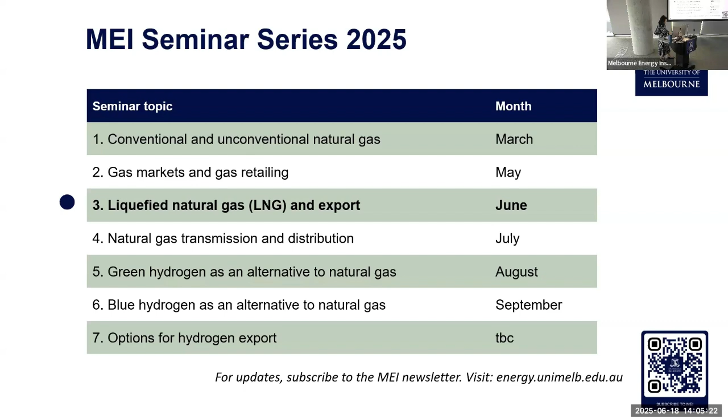So I'll move on to my presentation. The presentation is basically 4 areas. Firstly, some fundamentals about LNG, a bit of history about it, some considerations of the aspects that drive the so-called value chain, and then the place LNG has in the global energy mix and demand, and finally where the LNG supply chain space is with regards to our decarbonisation journey.

So firstly, this may be something that many of you are already aware of, but I'll go quickly through it again anyway. What is natural gas? Basically, it's a generic term that refers to a mixture of light hydrocarbon components. It's generally mostly methane, anywhere up to 90%, with a few heavier components such as ethane, propane, and butane. So the actual composition of any natural gas depends on the reservoir which it's been extracted from, and also the market that it is going to be consumed in.

The chart in the top right shows a number of different sources of LNG, their Wobbe index, and the fields and the regions where they are produced and used. The natural gas heating value and composition can actually be tweaked while we're producing it, and also at delivery to allow entry to different markets.

The cost of natural gas is based on its energy value, and by that I mean it's bought and sold at a cost which is basically per million BTU or terajoules. This is a little bit different to oil, which is cost per volume or per barrel within a density range. So when you cool down natural gas to minus 162 degrees, it turns to a liquid, and that makes it much more safer and efficient and convenient to transport on a high volume basis.

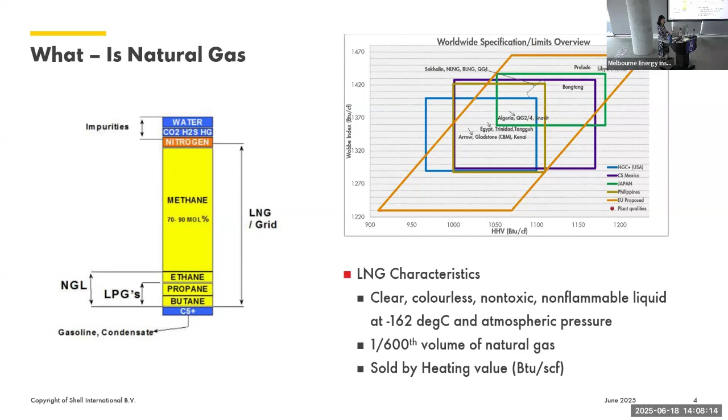So moving on to the why of LNG. Turning natural gas into LNG allows the effective distribution of energy to the end users - economies and industries, homes. The sources of gas tend to be in fairly distant and quite inconvenient locations, a lot offshore, deep water, making it hard to access. By producing and liquefying natural gas, it enables the international trade of energy, provides energy and energy security for countries which do not have their own natural resources, and it therefore allows flexibility and reliability for where gas is sourced and where it's used.

In the past, pipelines were a common method of delivering gas to users. The technology of a pipeline is quite simple, we're all familiar with it and it works very well, but at longer distances they do start to become very uneconomic. You need a lot of compression stations, a lot of power. It's also not very flexible to change capacity.

And a recent example of how a pipeline can be quite limiting is the Russian pipeline gas, which used to be a major supply of energy to Europe. Since the situation in Ukraine, much of that method of supply has actually been cut off by sanctions, and so the import of LNG via the sea has filled part of that energy gap.

The environmental impact of LNG as a baseload fuel supply to power plants is much lower than coal. Natural gas produces about 50% less greenhouse gas emissions and significantly improves air quality. Gas-fired power stations don't produce the same significant particulates and SOx components that coal-fired power does, which results in higher air quality, less respiratory health impacts, and the smog that is very visible in coal-fired areas.

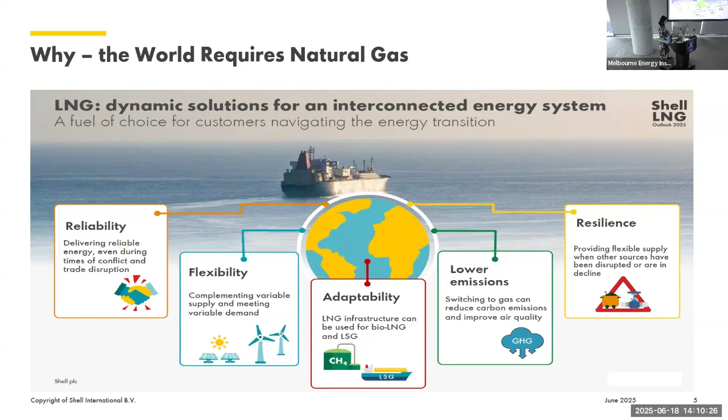So getting on to how LNG is produced. Well, the fundamentals of making something cold are quite mature. We've all got a version of it in the home - our refrigerator. It uses the Joule-Thomson effect to cool a fluid and reject heat to the atmosphere. An LNG facility uses the same thermodynamic basis, but just on a more efficient and a much larger scale.

Once you've sourced the gas, you need to clean the gas to remove impurities such as CO2, H2S, nitrogen. Then you need to dry the gas, remove water to avoid those components and water freezing up and blocking up the process, but also to comply with the end user specification. Once you've cooled the gas to liquid, you need to store it, and then you need to deliver it to the customer. So the whole process is quite energy intensive - you need about 7 to 8% of the natural gas to be consumed as fuel to produce LNG.

There's two main technologies which are common in the baseload LNG production world. The mixed refrigerant process, where you could have a single mixed refrigerant or a dual mixed refrigerant with a propane pre-cool cycle and a main refrigerant cycle. The second type, which is now quite prevalent in the United States, is the cascade process, which uses pure components - a propane cycle, an ethylene cycle, and a methane cycle.

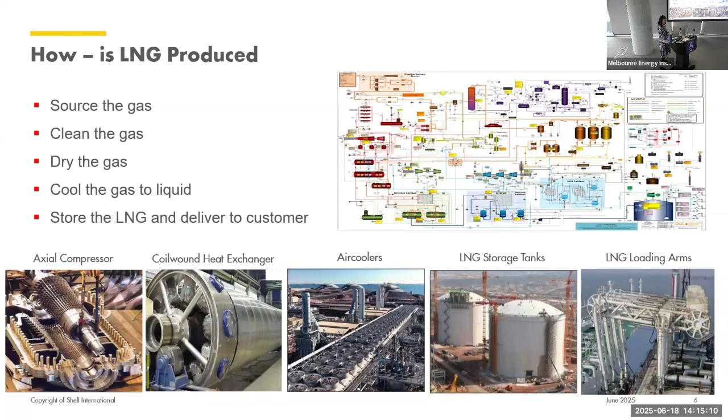So when we talk about the LNG value chain, really it's just the phrase that covers the journey of a molecule of methane, which starts from the reservoir through the wellhead, where it comes to the surface. It's then treated, goes into a liquefaction plant, cooled to liquid, then is loaded onto LNG carriers, sailed across the seas to its export destination.

The chain continues at the destination. As it's unloaded, it then has to be turned back into natural gas in a process called regasification before it's able to be delivered to end users via the domestic piping network to be burned for energy.

Just a few words on how LNG is commercially traded. LNG does differ from the traditional oil market in that typically you have a long-term relationship between the buyer and the seller. That's because facilities are very expensive, tens of billions of dollars. They take a long time to develop and build. So generally 4 to 6 years for the development phase, and then another 4 to 6 years for the actual construction.

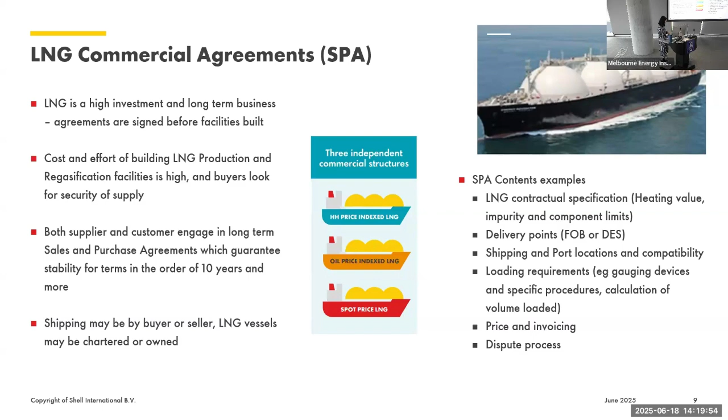So as I said, for end users of LNG, you need to turn the liquid back into a gas by vaporization or through a regasification plant. It's the reverse of how you make LNG. You're putting heat back in.

It still requires a facility that uses technology, and the most common technology is the open rack vaporizer, which uses seawater, which is very readily available at LNG terminals, as they're generally on the coast in ports and in coastal areas. There are also some LNG terminals located inland, where you can use ambient vaporization and heated vaporization.

In the last few years, there's been a very fast emerging group of users in shipping and heavy road transport sectors. LNG generates 25% less emissions than diesel and marine bunker fuel. So there is actually a changeover driven by both social expectation and a legislative mandate for greenhouse gas emission reduction. Now, given that 90% of the world's physical goods are shipped by sea, this is quite a sizable contribution to reduction of greenhouse gas emissions.

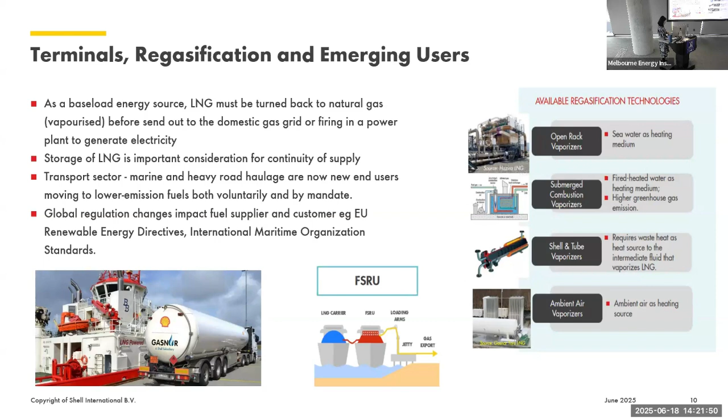LNG demand at the moment is around 400 million tonnes per annum, and it's projected to increase to just under 700 million tonnes by 2040. Now, of course, forecasting is an art. It's informed by global dynamics, and black swan events like pandemics, wars, and changes of government can result in very different actuals and estimates.

Last few years' demand projections were a little bit higher than this year, so there is some fluctuation. It is slowly coming down, but it is still a significant increase in demand.

The top LNG importers of the world, as I mentioned before, are Asia: China, Japan, South Korea, India, Taiwan, and very recently Europe. So Spain, France, and the UK have increased their LNG import as a consequence of the Russian gas sanctions.

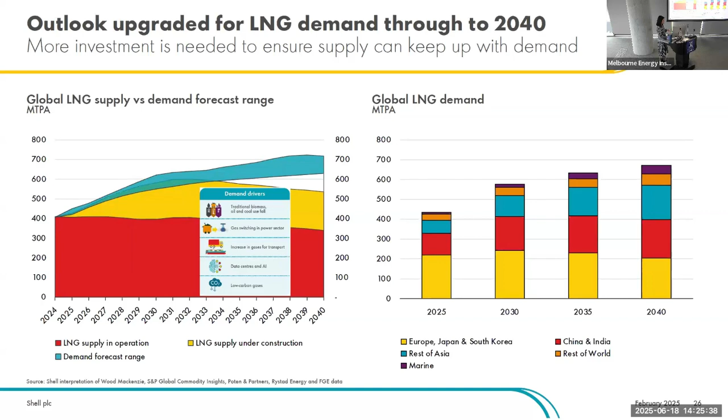In terms of capacity and production, the top producers in the world are the US, Australia, Qatar, Russia, Malaysia. There's also currently new LNG capacity being built in the US still, Qatar, Nigeria, Abu Dhabi. So demand and supply are still working their way out.

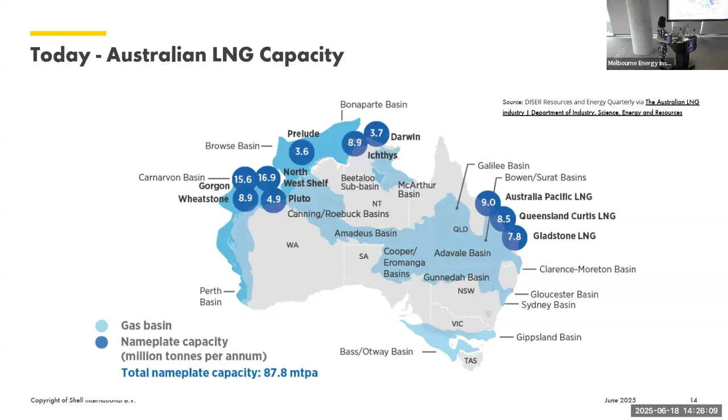So now moving on to some words about decarbonising the LNG supply chain. Since I last spoke in 2022, the efforts in decarbonisation inside the LNG supply chain have become quite clear. There are a few emerging directions, and decarbonisation is driven not only by suppliers but by customers - 98% of importing LNG buyers actually have a net zero commitment. One effort is to reduce the carbon intensity of the existing LNG production process and infrastructure.

As I'd mentioned before, making LNG is actually very intensive. You need to spend about 7 to 8% of the gas for fuel, for compression power, generally in gas-fired turbines, and also to supply energy for other parts of the plant and process. So electrification of LNG facilities using renewable energy will reduce the emissions otherwise generated by fuel gas. There are some existing LNG facilities looking at options to convert their existing gas turbines to electric motors, and there are other facilities in construction right now which are all electric drive by design.

Another way of reducing emissions from gas firing turbines is by utilising different fuels. So adding hydrogen to gas and using that in turbines reduces carbon emissions. That's quite a fascinating topic because it has to be enabled by the supply of hydrogen, and you also need good collaboration with your turbine vendors for appropriate technologies. It's a less mature option than electrification, but it looks quite attractive because there's a lot less modification of an existing plant than retrofitting electric drivers.

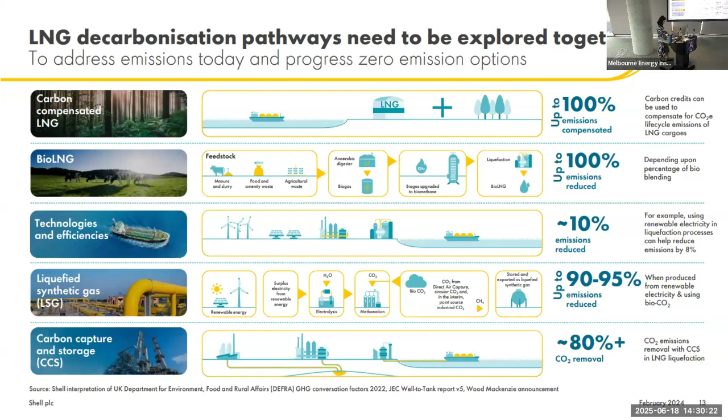So I'll just go to the next one for synthetic LNG or liquefied synthetic gas.

So this I find really interesting. The concept of synthetic LNG is methane produced by using green hydrogen as a feedstock, reacting it with carbon dioxide to form methane and water.

So the methane then is cooled and liquefied in the conventional LNG process and shipped in conventional and existing LNG value chain infrastructure. As part of the circularity, CO2 would come from direct air capture or industrial generation, for example the biomethane off gas we talked about or CO2 capture from flue gases.

I think the concept of generating green hydrogen and then conversion to methane is basically based on the practicality of using the existing LNG infrastructure which we have. I know the last time I spoke, people were very interested in hydrogen and where is hydrogen in the energy mix for the future.

Large-scale hydrogen is still pretty challenging. Liquid hydrogen, as the scientists know, only occurs at minus 253 degrees Celsius, a lot colder than LNG at minus 161. The power requirement to liquefy is basically 8 times that of LNG. The requirement for cold temperature materials to make that happen is highly challenging.

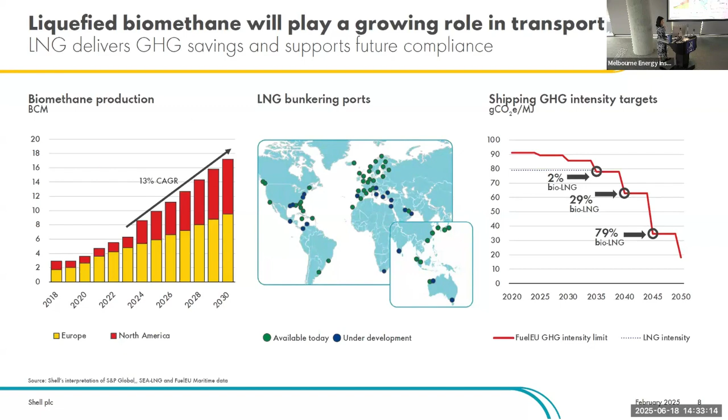Now, as a part of greenhouse gas mitigation, we've been talking a lot about CO2, but methane is another one that's become quite front of mind recently. So the focus in the recent past has been CO2 as the main culprit of global warming. However, we know that the global warming potential of methane is 25 to 28 times higher than CO2.

So the emission of methane through the production of LNG and gas, if uncontrolled, can actually more than offset the positive impact of LNG versus coal. Because of this, the industry has taken a very serious and stringent approach to methane intensity in LNG production.

There's the Oil and Gas Methane Partnership, known as OGMP. It's a voluntary initiative led by the United Nations Environment Programme, and it provides a framework for oil and gas companies to improve their accuracy and transparency in methane emission measurement and reporting. The signatories to the OGMP can be certified through different levels of verification, from source level engineering type calculations through to emission modelling, and then finally through to quite advanced drone imaging of production facilities.

The most recent industry average of methane emissions is less than 0.15% of methane, and there are a number of sites which are even well below that number.

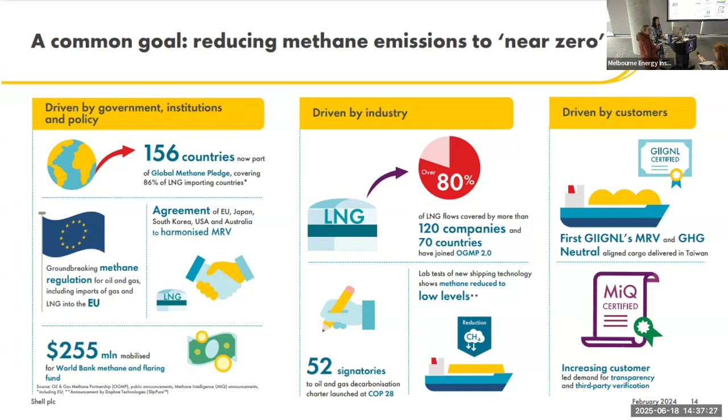Thank you, my name is Arif Susatyo. I would like to ask regarding the fuel source of the LNG vessel. As we know, usually vessels utilize marine fuel oil with the low speed diesel engine, and LNG has boil off gas. So my question is, for an LNG vessel traveling from Australia to Japan, intercontinental like that, is the boil off gas utilized for the MFO engine, the marine fuel oil engine, or is it full LNG? And the second question is, how is the fuel compatibility of the natural gas to the low speed diesel engine? Thank you.

So yes, absolutely. Most LNG vessels these days will utilize boil-off gas for the main journey. I believe that when you're in port, there's different requirements depending on the port, and it may be a requirement that you use a certain type of fuel when you're moored, discharging, or at a port doing other business like repairs. So that's been one of the selling points of LNG carriers. Even before we talked about emissions reduction, the use of boil-off gas has been far more environmentally positive than the use of marine fuel oil.

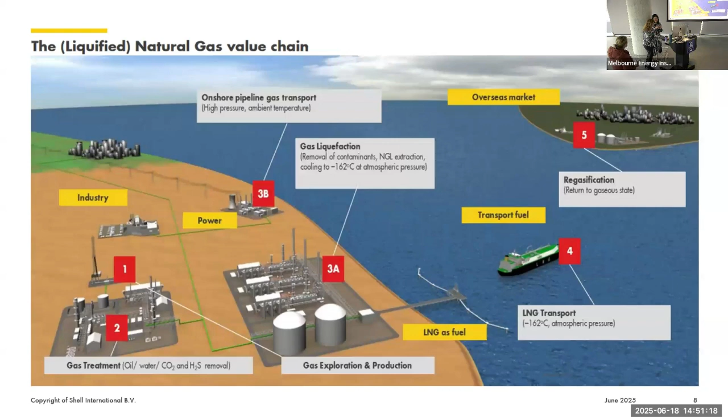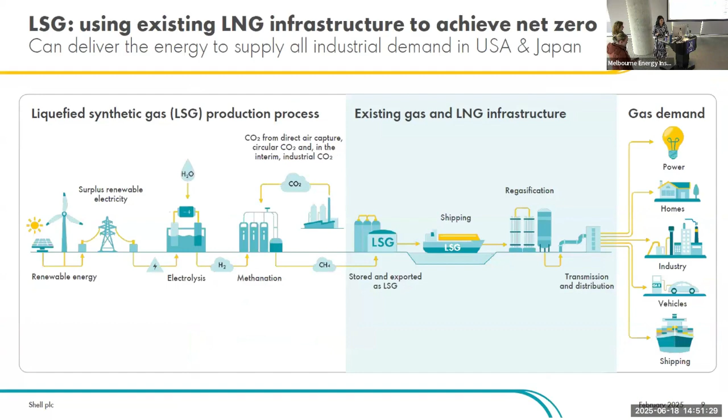So the methane, let me go back to a slide on methane. Sorry, yeah, the 50% I don't think takes into account any of that, but on the methane emissions, the fugitive emissions, I think the number is if in the production process you have more than 0.2% emissions, then basically the use of LNG is kind of on par with coal.

Is that more accurate than it was, say 5 or 6 years ago? The measurement now is definitely far more accurate, yes, because of the measurement and verification through the Oil and Gas Methane Partnership. Is that because the leakage at facilities is better captured? Yes, absolutely, because if you measure something, then you can see it, and then you can actually do something about it. Does that answer your question?

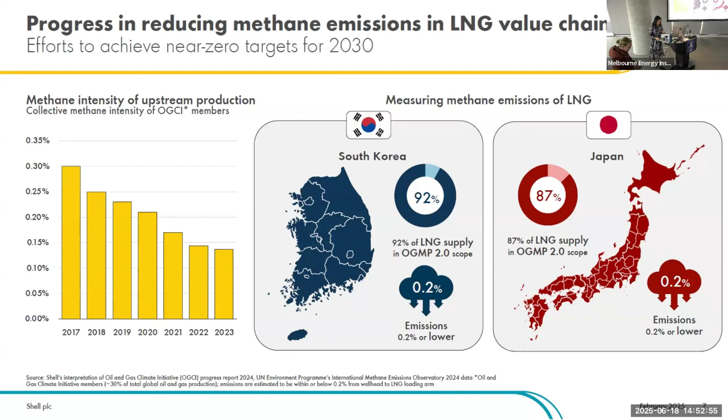So is that the engine's usage rather than the leakage? Oh okay, then all right, I think that's the technology of the engine. So the leakage, if you're talking about an LNG carrier that is actually leaking—that's how, okay then, all right, I've not really heard of that. I mean, for reasons even beyond emissions, you don't want methane leaking anywhere, right? It's an explosive hazard. So I'd expect that the integrity of the vessels against leakage would be fairly high, there'd be very low leakage.

I've had a follow-up that geological hydrogen is silver hydrogen. Oh okay then, all right, thank you, I'm gonna Google that. Yes, I know the green, the blue, the brown, the grey, the black, but silver.